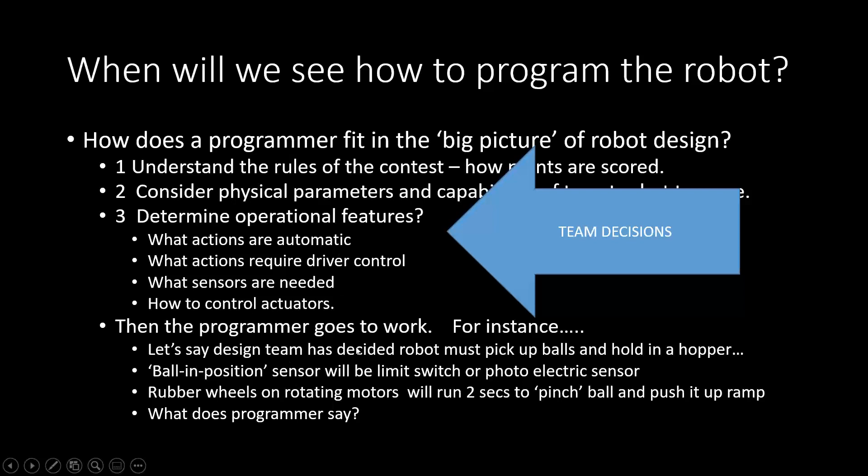Then we need the program to start the motor and push the ball up into the hopper. And again, all this stuff up here is a team decision. Down here is where the programmer really starts to earn his keep. So let's say this is kind of the mechanical design we're looking on, and the function we're talking about is this one down here where the driver guides the robot so that a ball presents itself, and there's some sort of a switch that tells us the ball is in position.

And we need to drive these motors at counterposing directions to be able to push it or kick it up the ramp. And so in the discussions that we've had, I've shown you how to drive, because these are numerical signals now, to create a numeric signal that has a positive direction and a negative direction. And that's what we need to apply to these motors.

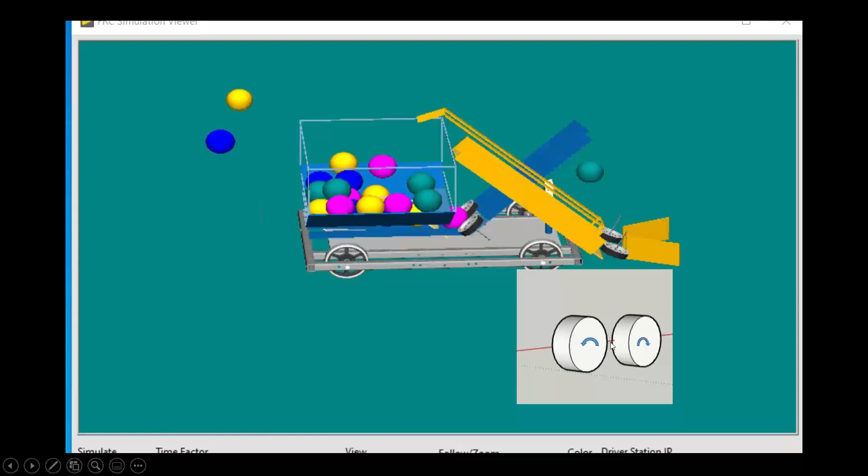So then the word problem that you as the programmer should create is this. When the ball is in position, it is true. When that signal is true, because it's a Boolean signal off of the limit switch, and the driver presses the button on the joystick, then the motors will run for 2 seconds to push the ball up the ramp. And if that's what the physical designers want to happen, then this is the word problem that you need to solve as a programmer.

Now, and we'll get into this a little bit more next class, but if you don't want to burden the driver with this function, it could be included in an automated control, in which case the word problem would be when the ball is in position and the limit switch is true, then the motors will run for 2 seconds to push the ball up the ramp and then stop and wait for the next ball in position signal. And if that's what the team wants to do, then you need to design the system that'll make that happen.

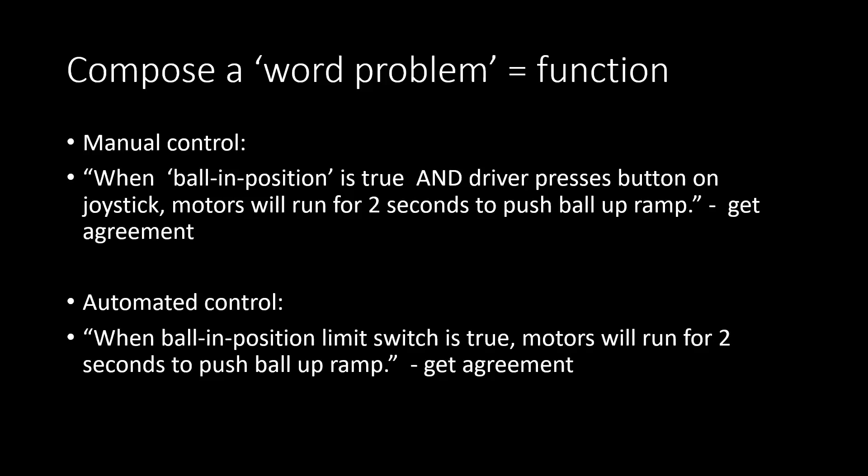Anybody got any questions on that? Does that make sense? I think it's pretty clear. It's important for newbies. It's real important that you step up and start asking these questions. Don't wait for somebody to tell you this. You need to know what it is you're trying to do. So I encourage you, and asking questions is the best way to go. So I think it's a good sign that you've got people that are willing to step up and say, hey, I don't know what you're saying. Tell me again what's going on.

Okay, so what we're doing tonight is I'm going to image the RoboRio. Before you run a program, after we've imaged it, that just means we can talk to it. The next thing we want to do is make sure that it's wired correctly. And so I sent out 2 Word documents that are what I call robot setup worksheets. And the idea is to have a list of every channel that's on the RoboRio, and then make sure that the wiring I/O, the way the robot is wired up, matches what you've agreed to.

And so that device, see if I can find it. This list, this robot setup worksheet, is like the communication vehicle between the people doing the construction of the robot and the people programming the robot.

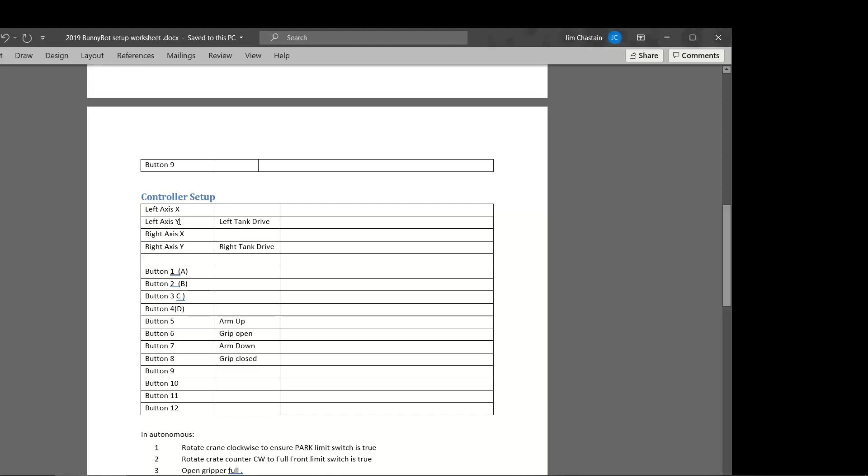And we'll get into some of this other, but this is the way that the joystick is set up. And so there's an agreement that we want to have tank drive, and so we're going to need to have the x-axis, the y-axis of two joysticks come out and be available for the drive mechanism. So this is a typical setup worksheet after the design has been done. And the idea is if you're going to change something in the physical design, the programmer needs to know what you changed, and we both agree to make a change to the setup worksheet.

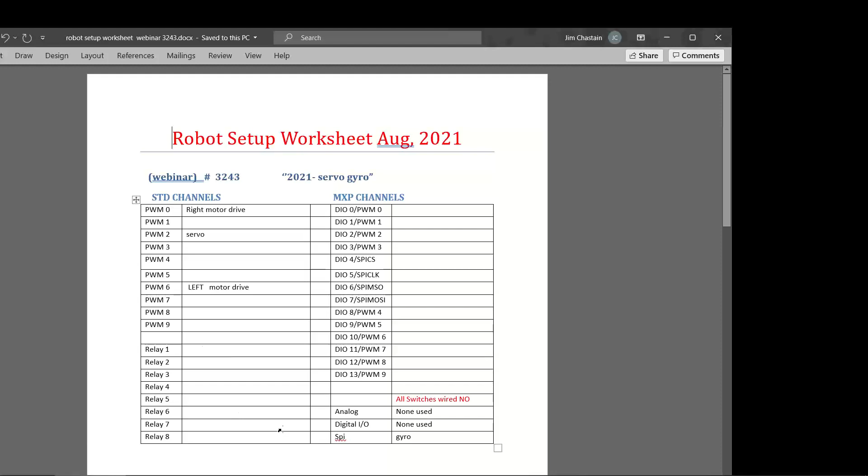Okay, now, so what I'm doing tonight is I've got a setup worksheet for this particular robot, and I want to make sure that the wiring matches. We've got PWM0 set up to drive the right motors, PWM2 for the servo, PWM6 for the left motors. We got a gyro on the SPI port, and I think that's all I've got.

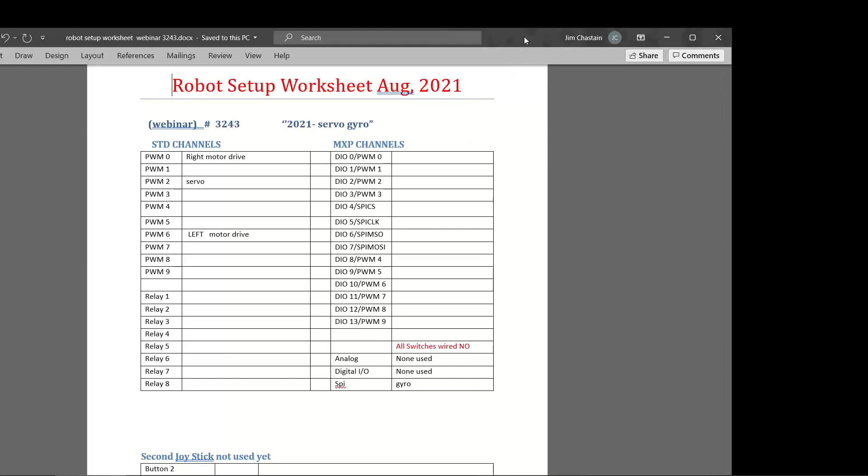Okay, so with that in mind, let's go see how our imaging tool is working out. Okay, so it's completed the image, and it says it was successful. The IP address is 172.22. The host name is my team number, and it says you must deploy code to use the robot. It's like, okay, fair enough. And when I click OK, what it's telling me is it's programmed the image in the RoboRio that allows me to communicate with the RoboRio from the driver station.

So now that I've recognized that 3243 is the team number that's been programmed into it, and we're with our latest version of the field image or the game image, I'm going to close this. I'm going to go out and open my driver station. Now, if you recall, the thing that we haven't done in all of the classes we've done so far is build the code. We played with it in the simulator, but we haven't really built it. So now I've got a dashboard and a driver station.

Now, the fact that I have this set up for this team number allows me to see that there's communications with the RoboRio. If I have a different team number in here, it's not going to like it because the communication system is not set up to recognize this other number. And so this is what keeps us different from anybody else on the field, and it's important to stay on track. Now you'll notice it gives us the status of the battery. The battery is a 12-volt battery, and you don't want it to drop much below 11.5 as you're running, so you want to keep charged up batteries available.

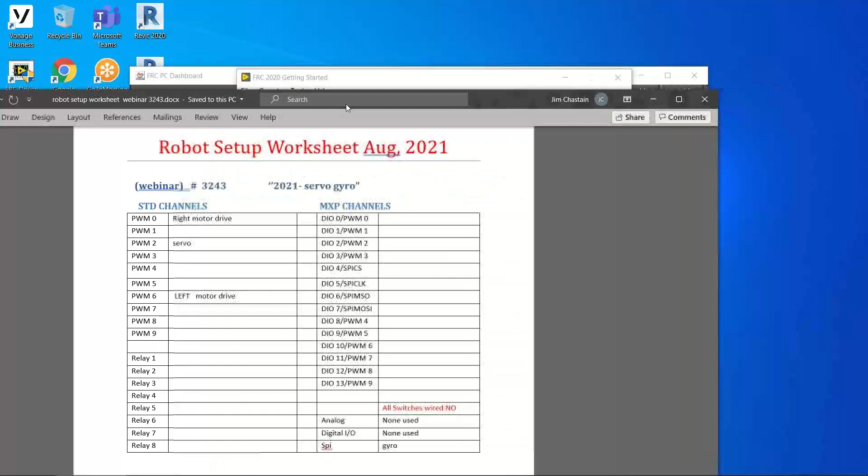Okay, so when I say we're gonna set up, check the wiring, I'm gonna use the motor control example and verify that the right motor is connected to PWM0. So the way you do that is come down here to Support, click on Installed FRC Examples, and it brings up this little display here. And what we're looking at first of all is robot and motor examples, and I want to go with the plain motor control.

Now, with my teams, every time we've turned the robot off for more than 2 hours, let's say, like overnight, or we've transported it, I insist that when they first turn it on, they go through every channel and make sure nothing has changed since we last turned it on, because we don't want to run a program where the wiring is different than what we expected.

So if I double click on this motor control example, it opens up an example for me that looks surprisingly like a robot project that we've been using, except there's not the FRC framework. There's just a VI, and again, they're showing us an example of how to hook up the motor. So this is what the RoboRio looks like.

And all the channels along the right-hand side, if we're facing it, are labeled PWM or pulse width modulated. All the channels on the left side are digital I/O or DIO. There's 4 relay channels down here at the bottom, and there's 4 analog channels. Now, this is a motor controller, and they show us the colored wires on a PWM cable and how the orientation should be. So right now I'm going to test PWM 0.

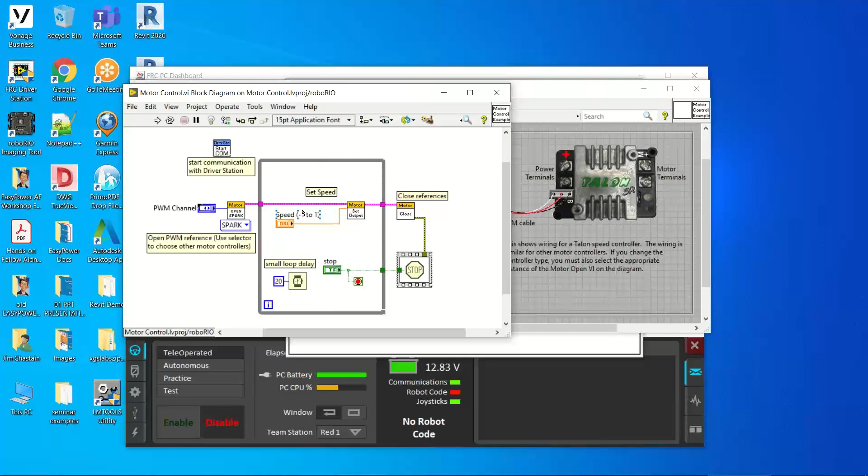Before I do that, I'm going to show you what the block diagram looks like. The reason we want to see the block diagram, this is how we would hook it up to run it. This is how the program is running right now, but this is what we need to reproduce when we get into our own program. So I'm going to run this with the arrow. It's going to show me that it's deploying it. It has to check for the conflicts in the communication link, and then it dumps the code.

Now, right now, it's running the code as it loads this code into DRAM in the RoboRio. And so we're running it both in my laptop and in the RoboRio, and that's why we can use probes when we want to look at the block diagram. Okay, so it's loaded it in. Now we're registering that we have robot code. And you notice we need to have the driver station running and teleop enabled.

All right, so again, this is a dangerous machine, and especially when it's hooked up to my laptop with a USB cable, I don't want it to get out of control. So before I turn anything on, before I enable anything, I want eyes on the robot, and I want to make sure there's nothing touching the wheels or any wires or anything that's going to be moving. So right now things look pretty clean.

Now, another thing to remember is emergency stop is the space bar on your computer. So the first time I turn on a robot or have any of my students turn on a robot, I have one sitting with their finger over the space bar, and if anything goes wrong, shut it down. Okay, so with that said, let's go ahead and enable it. We have a zero signal. Now I want to increase this just a small amount. So 0.1, nothing is happening.

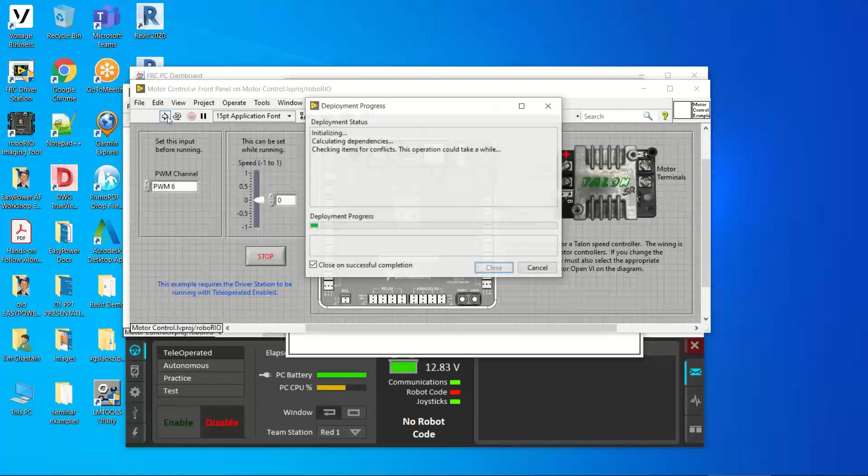All right, so now that I've changed the channel on my example, I can run it. We've got good code. I'm going to enable it. Again, I'm checking to make sure there's no wires or nothing touching the motors or the belt drive over here on the right side. And I want to start very slow.

Okay, with a positive signal, the motors are driving such that they would push the robot forward. So that's the opposite signal that I would get from my joystick. So this tells me that my channel PWM6 in my program needs to make sure it's inverted.

And if I go negative, motor goes backwards. I don't know if you can see that, but you can also see there's red flashing lights from my motor control. So at this point, I'm happy. I can probably make a lot of noise.

Okay, so I'm happy with my motor connections. Now I need to make sure that I'm making a note, again, for my program to make sure that it is inverted for PWM6.

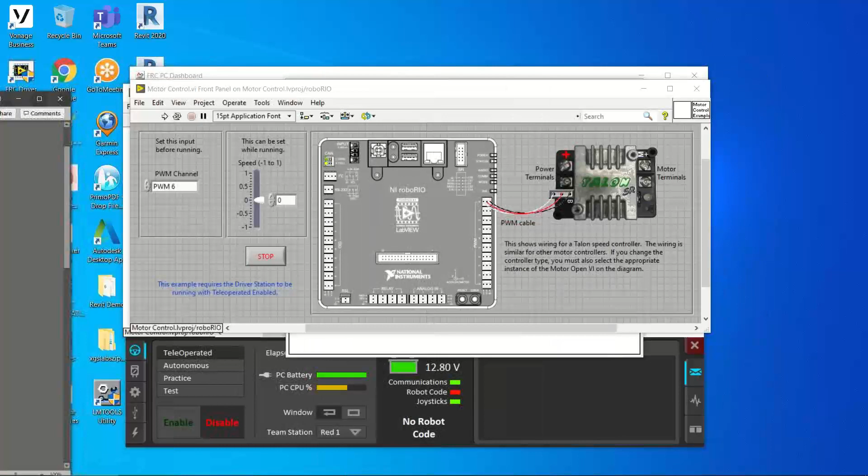Okay, I've also got a servo on PWM2, so let's go find the servo example. I'm going to close this out, go back. My example is this little magnifying glass down here in the taskbar. I'm going to look for the servo example. And it's exactly the same type.

It shows me how to hook up a servo to my PWM channels. It shows the white wire to the inside. So my PWM channel is this little puppy right here. I just have it sitting up on the edge of the robot, and it's on channel 2. So it's 0, 1, 2 as far as the PWM channels. And my white wire indeed goes to the inside of the RoboRio.

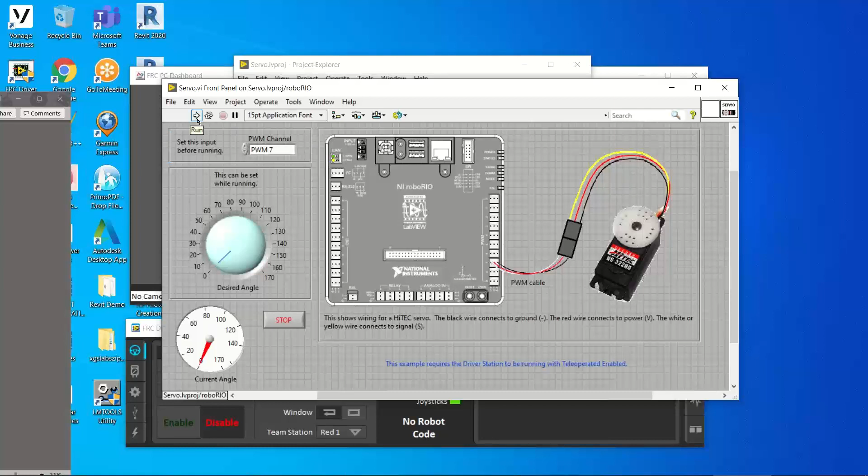Now, if you recall, the servo - well, let's just see how it runs. Part of this is understanding how the device works, and it follows the angle that I give it. I want to make sure I put a little sticky note on the wheel so we can see if it's turning.

Okay, now again, we need to activate it... so I'm not seeing anything change. Ah, I got a PWM7. Nice going, Jim. So let's stop. We want PWM6. No, 2. Sorry about that.

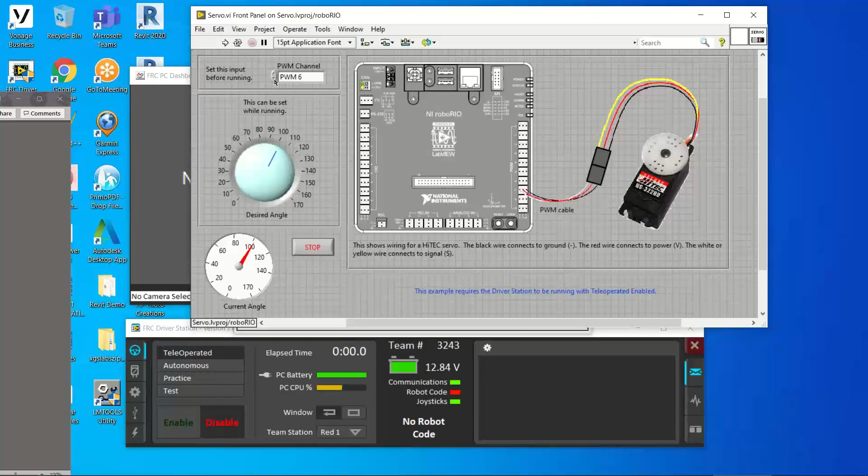Here I was saying bad things about my wiring team, and it was me. PWM2. And again, I verified that there's something on PWM2. Looks like it's a servo.

All right, so we got the code running. Let's enable it. You guys see the little sticky note changing directions? Now this is what's used in a remote control airplane system for the ailerons. So it's got some fairly decent torque on it.

Can you see it change? Oh, it's over here on the bottom right. Okay, so I haven't verified the angle. I'm not too worried about that, but it does follow the commands to increase and change the angle.

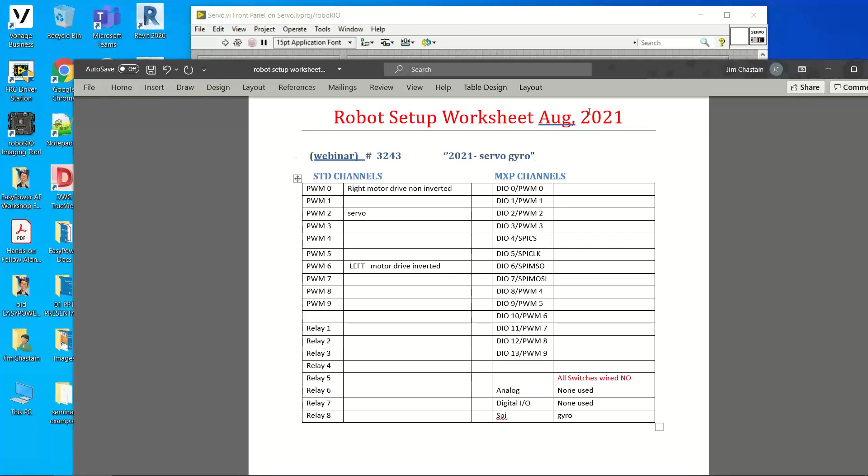Okay, so the only thing left in my setup worksheet - I'd make myself a note that the servo seems to work okay. The only thing left is my gyro, which is plugged into the RoboRio itself. So I'm going to call up the gyro angle, the gyro example.

Now, again, I strongly advise testing all your I/O channels before you run the code, for a number of reasons. One, it's good practice, and two, there will be a time when things fall apart, stop working, and you're going to be in the middle of a contest, with all kinds of noises going on, and people looking at you to make sure you're going to get it to work, and you need to have something to keep your head together.

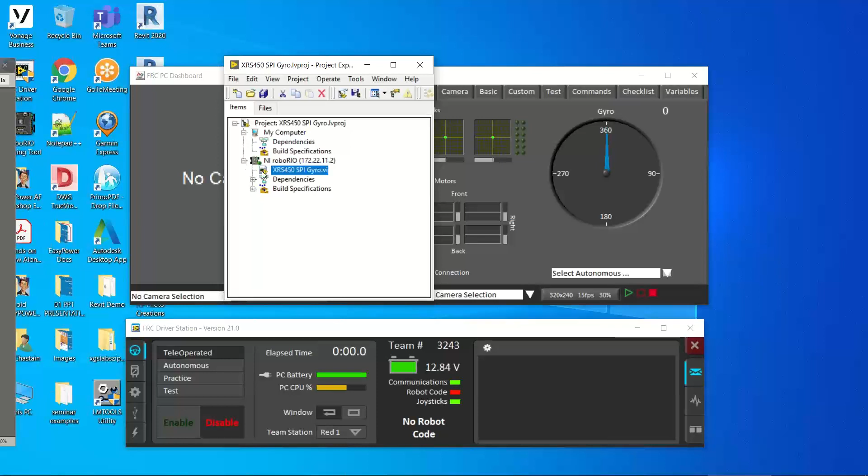And being able to run these examples and know them like the back of your hand will be extremely useful in troubleshooting what's going on in the robot. So don't be afraid to practice these channel checks every chance you get.

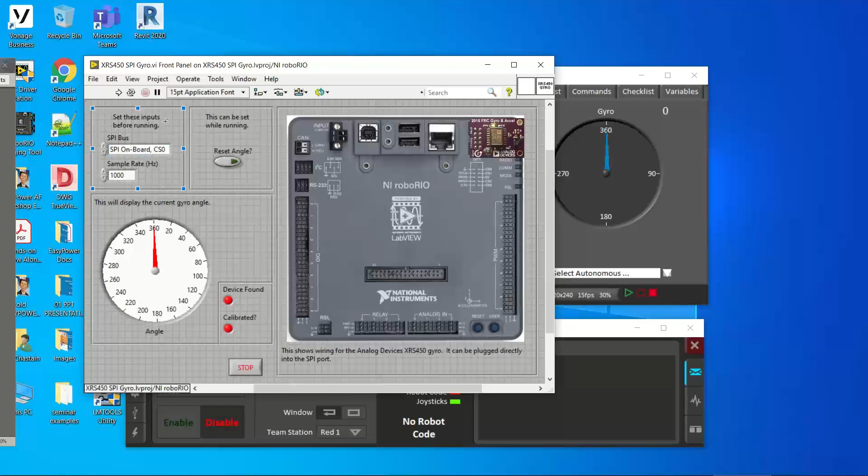Okay, so again, this is a gyro example. It's actually plugged into the RoboRio itself, and this location is known as the SPI, or serial peripheral interface. So it's the onboard CS0. We're going to run it. Now it's set up for a sample rate of 100 hertz or 1000 hertz. So I'm going to, by default, just take their word for it.

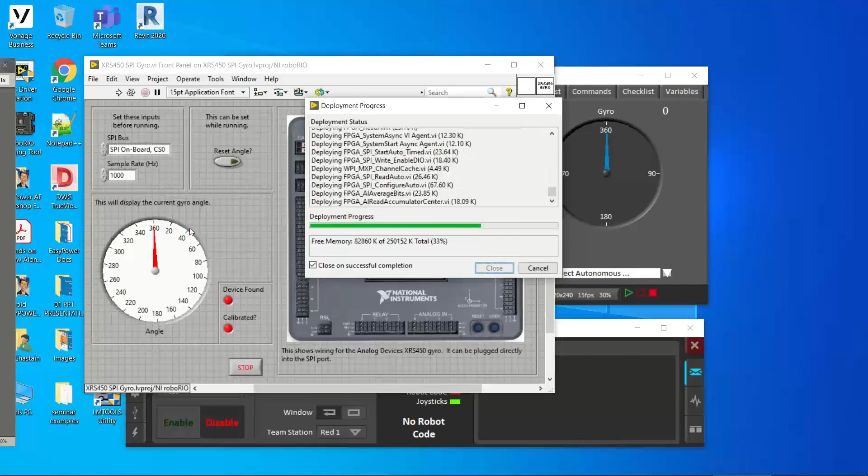Seems like it's running pretty good. Now, if I had a different type of gyro that had a cable on it, I could pick the gyro up and move it independently of my cable, so I can see that my device has been recognized. If I go to the block diagram, it's showing me, okay, on one of the outputs from the get angle - oh, it's actually from the pipe coming from the gyro - is the recognition that it's been found, and so it's showing me a positive signal.

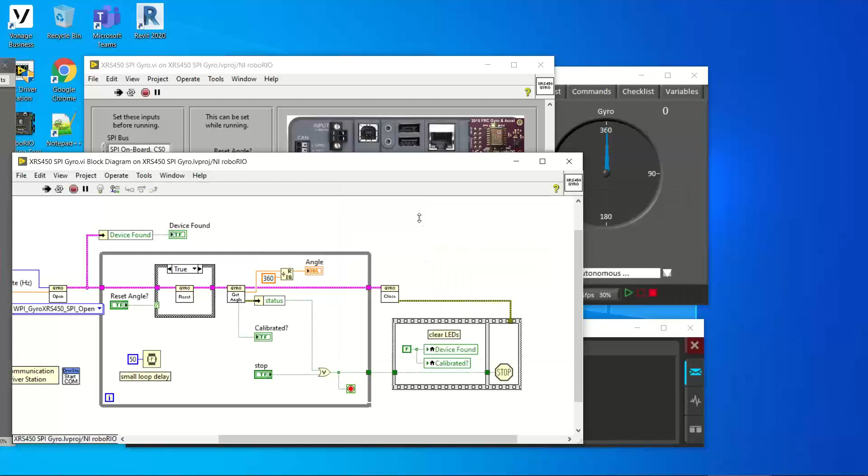It found it when it booted up, but it's not finding it now because it's not executing—we're inside this loop. So what I was trying to say is, to see if the gyro works, I have to move the whole robot. Fortunately, I have it on a box that I can kind of scoot around.

So my gyro works. Does my reset work? It works. Anybody impressed yet?

I'm impressed. Good. And I strongly suggest that students go through this every time you turn the robot on, for the day, for the night, for whatever your meeting session. Okay, so now we verified that our wiring team did a good job.

Now I'm ready to load the code and try to run my code. So let's go back—I wrote this down somewhere. There's a couple things I want to do. First of all, I want to open up the dashboard. I actually wrote these down.

So 2021 3243 dash—we're going to build and store a dashboard that reads the servo right here. Okay, do you remember when we were playing with the dashboard in the simulator?

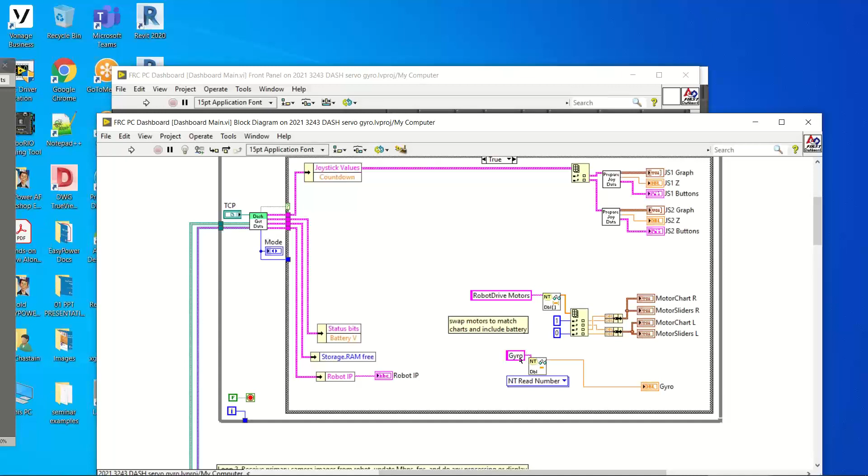If we go to the block diagram, I've read—I will, when we get to the program, write the value of the gyro into the network table, and in the dashboard, I want to read that value, and connect it to the display. I need the spelling and case for this channel name to match what I use in the program itself.

Now, we don't have a camera, so we're not going to worry about the image right now. So now I'm going to save this and build it.

And to do that, I need to look at my project. So I'm going to build—just right click and build. Takes it a couple minutes.

Now, with that in mind, I'm going to close this one. This is the one it loaded originally. And we're going to have to check to see if it comes back. So I'm going to keep this handy.

Next thing I want to do is open up a program that I've already written in the robot project. So let's go to my getting started page.

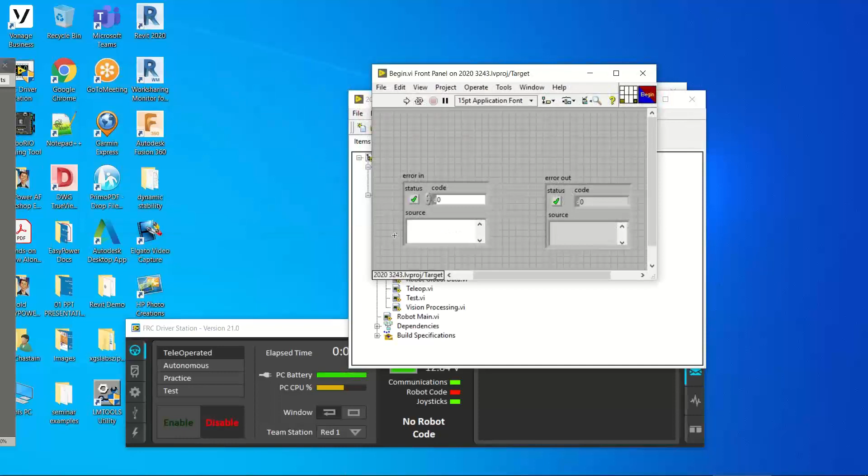Okay, again, I need to have my motors lined up with the channels that we're using in the setup worksheet.

So here, this is not the one I already did. Let's give me a chance here. Talk among yourselves, I'll be right back.

Any questions about the setup worksheet? Everybody understand what we were doing?

Yep. I'm okay with you there. Okay.

So let me catch up here. I've actually already got one set up, with the gyro being the main thing I'm keying on.

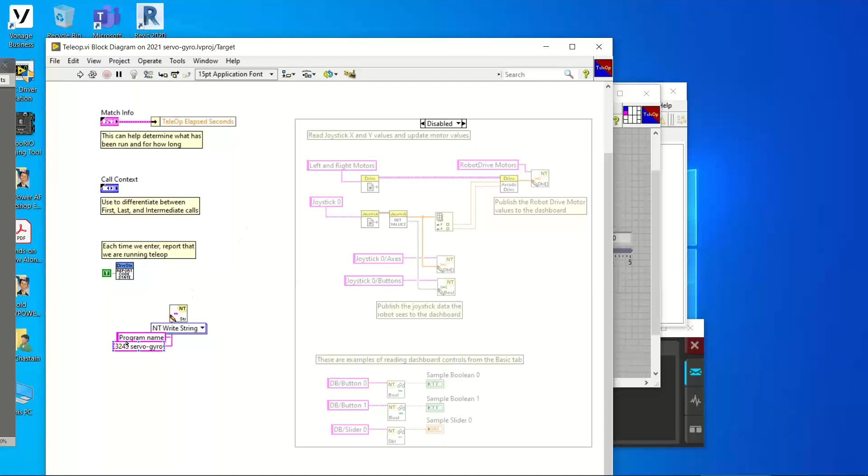Now here we go with TeleOp. If you guys recall last week, what I do is disable everything that's TeleOp with the exception—I disable all the code that exists, except I write the program name to the dashboard. So one, it tells me that we did get into TeleOp, and two, it tells me the name of my program that I've loaded into the RoboRio. And then finally, I put everything in the periodic task.

What that means is in the top loop, I call it loop A, sensors and joystick. Here I've unbundled the joystick from the pipe because I know joystick 0 has been put into the pipe, and I use the get value icon.

I take the array for the joysticks and I use joystick x-axis and joystick y-axis, and I save it, or load it, into robot global data. Then I also write the joystick axis to the dashboard with this label, which was used in TeleOp.

Likewise for buttons, we index it. I'm going to use button A to... I think, reset the gyro. Excuse me, button B is going to be used to reset the gyro. And then button A is going to be...

It's going to control the servo. So when button A is false, the servo is going to indicate 25 degrees. When button A is true, it's going to move to 120 degrees. I've saved the angle for the servo to robot global data.

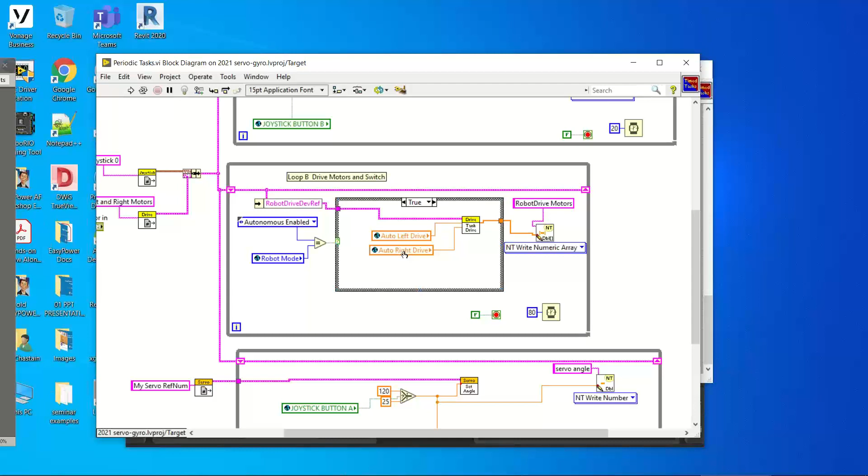In robot global data, I've got my joysticks, x-axis and y-axis, buttons A and button B. I've got the raw gyro data and the gyro display coming from my gyro output. You'll notice it's on a 360 range for the display, and when it's raw, it's going to be something different. We'll look at that when we run it.

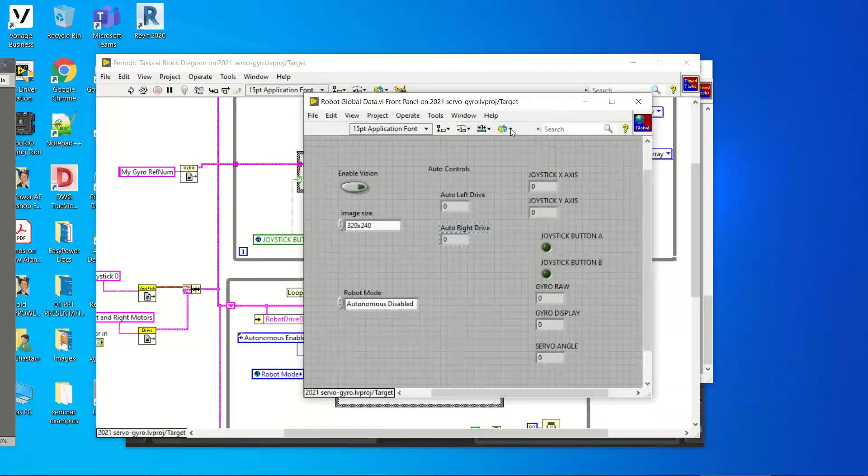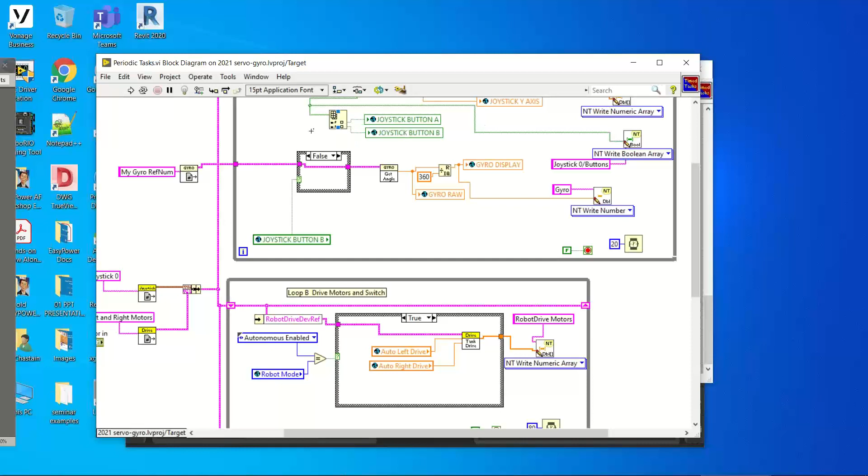Even though under my auto controls I have auto left and auto right drive at 0, I want to make sure I don't accidentally have any values set for that. So back in begin, I set up and set those values to 0 right here. Likewise, they always set up autonomous disabled for robot mode, so nothing can move when you first enable the robot.

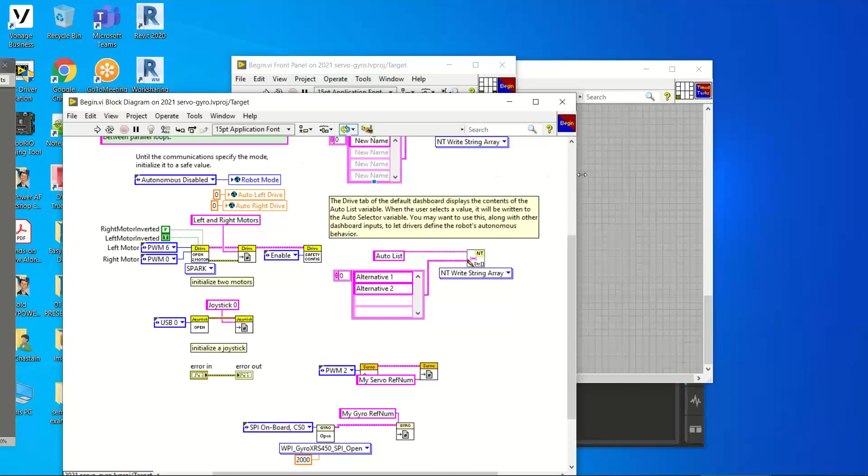Any questions about any of that? Okay, so we're going to run the program for the first time and see if it's running. Let's open up robot main.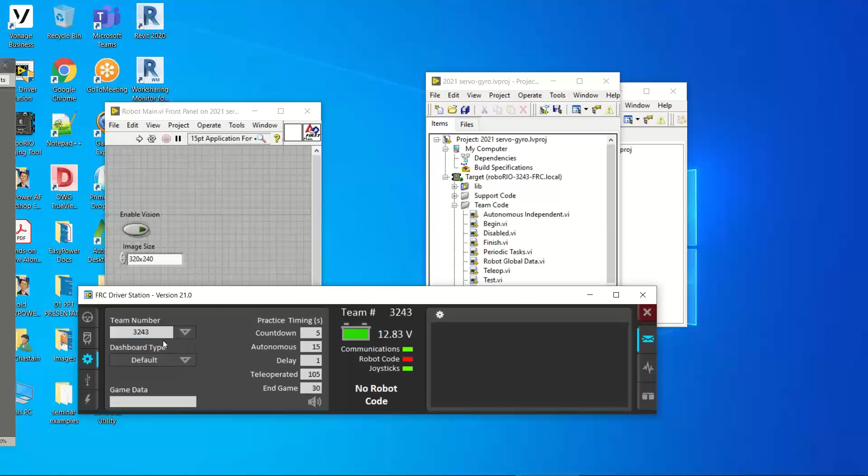I'm going to go back and see if I can tell if my... go back to default, and then see if my LabVIEW dashboard version is going to come up for me.

Okay, I'm going to run the code on the robot. We have communications, we have good voltage, and it's doing its thing.

Anybody have questions? Do you have to redeploy that code every time? Well, I do until I flash it. I mean, I haven't even debugged it.

So first I'm going to debug it, and then once I'm happy with it, I'll load it into the flash. And then the answer is no, I don't have to. When it boots up, it'll have this code in it. That's the last step. That's what we're doing, and that's the step we haven't covered before.

So right now I'm just running it similar to the way we were running the simulator. I want to make sure that my controls work, and if I've got the right dashboard, my gyro indicates.

Now, this came up with an error that says the gyro is having an issue because we're overwriting the depth of the FIFO. So I'm going to go back and talk about this for a second. I'm going to stop it with finish.

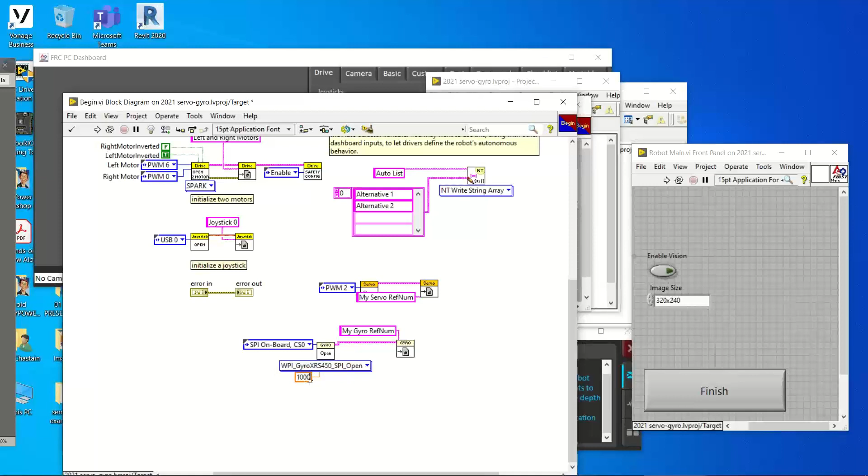When I set up the gyro, I used a default value of 2000, and what that error message was saying is that the RAM, or the FIFO, first in first out memory that's allocated to the gyro function isn't that large. So we're going to go back to 1000, because that's what they used in the example, and see if we can run that without getting that error.

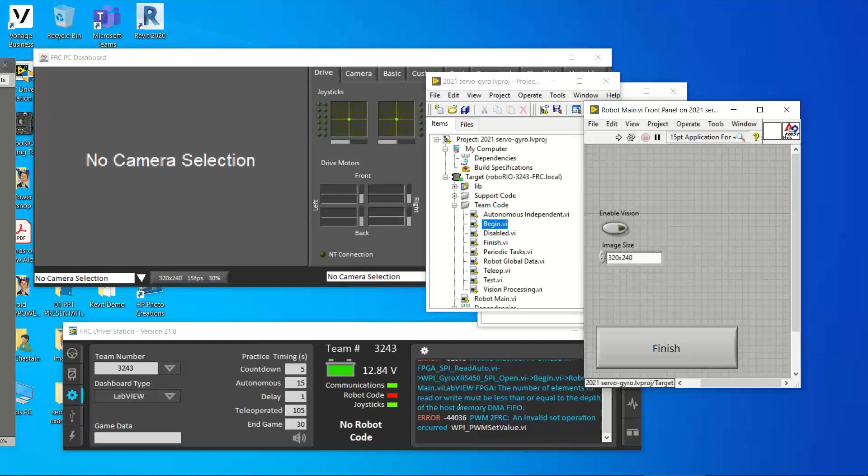The little technology details, like that's what scares me. Well, we'll run into things. But see, that's what's going on here, is that it gives you clues, and you just have to do a little bit of research. And you know, I should have stayed with what was in the example. I didn't. I took the default, and I made a mistake. But the reason for the details is there's some pretty cool technology that most of the public isn't aware of.

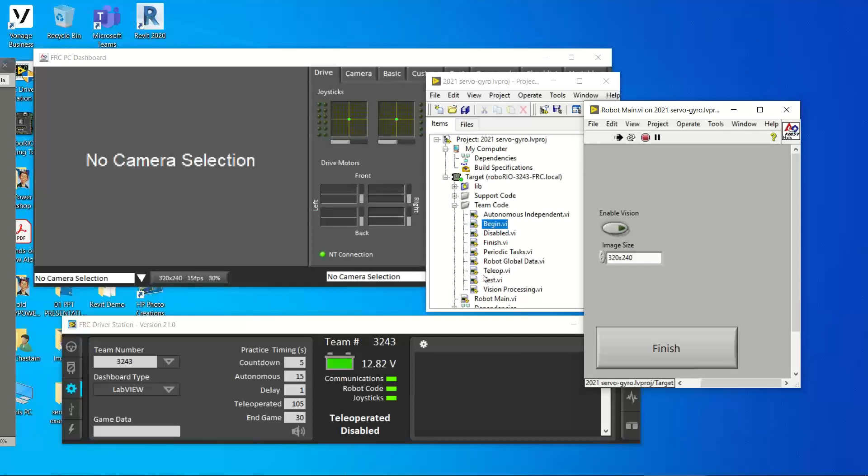Okay, so let me see if it existed here. WPI PWM set value. Okay, that one I'm not familiar with, so I'm not going to think anything's wrong yet. Okay, now here's another thing. Before I run the code, I want to verify all my controls work. So until I've enabled it, nothing's going to drive, but my robot global data is indicating all my signals.

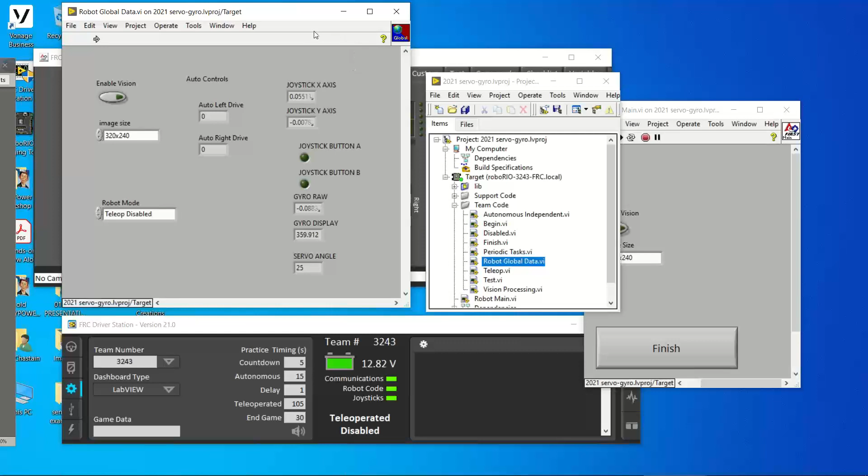So the joysticks work, the gyro is drifting, which isn't hurting my feelings too much. The buttons work, and I've got 0 for auto drive. So all of my controls are working as far as the program is concerned. So now I'm ready to go to teleop, enable.

Now, the other thing that you'll notice, even before I go to enable, you notice right here on the dashboard, I've got my joystick indicating, and these are the motor control signals. So if I go forward, I've got the left and right, one going a different direction or a different signal than the other. And it looks correct, because the right side is negative, which would make it go forward, and the left side is inverted. So again, it looks like things are in good shape.

So I'm going to enable it. We got my network connection. I'm going to go forward a little bit on the arcade drive. So pushing the joystick forward, I get both sides going forward. Pulling it backwards, it goes backwards. If I go at an angle, one side goes forward and the other side goes backward. See what I'm talking about, Leo, as far as the signals from the joystick driving each side. So this is arcade drive. So it computes based upon what the joystick is doing, what signal it needs to send to the left and right side.

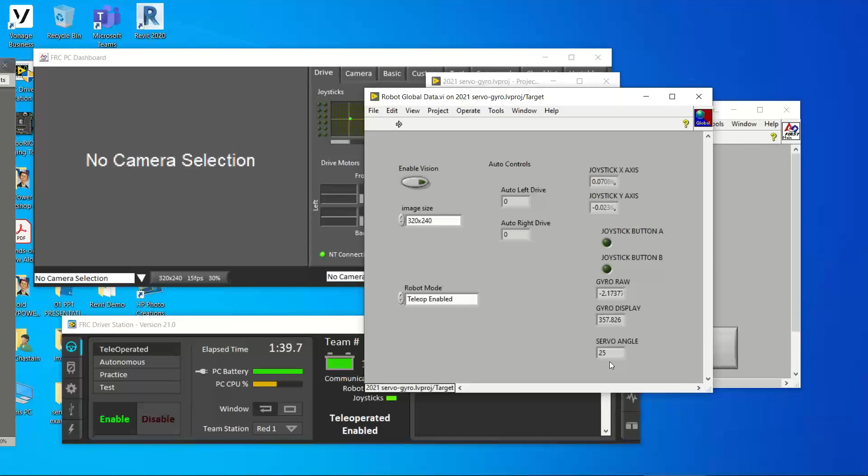Okay, now, because what we're going to do is deploy this into the flash, we won't be able to use probes. Right now we can use probes because we're still running the code in the laptop. When we deploy it into the RoboRio, we won't be able to see it, but because we're writing the variables on the robot global data into the dashboard, we can see them change here. And this is what we would use to debug it or verify what's going wrong.

When you talk about probes, you mean looking on the main global, the robot global data? Those are the probes you're talking about? No, I'm talking about the ones that we put in. If we go to the block diagram, we can look at the probe right here. And so this tells me all the buttons that are coming off of that joystick. And if I push a button, it tells me what's happened real time. And I can probe any signal line in the system. So let's say I want to look at my angle.

Yeah, I don't remember us talking about that before. So what are you doing to get the probe? Are you holding down a special key? Nope, you just left click. Or you just hovering over it? See, it has a little P on it whenever I... So let's look at this. Right now, I'm using the joystick to drive the motors, so I can put a probe there. Now see, here's your dead zone. See, based upon friction and inertia, there's a built-in dead zone in the motor controls, right?

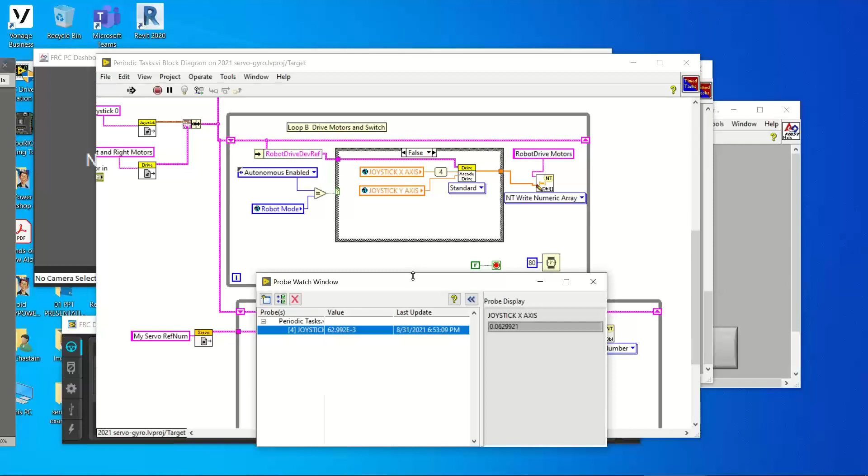Okay. Right. So we saw it in the simulator. It's not necessary to do it in the robot itself. But yeah, we've talked about these probes. You might want to go back and see the first or second lesson. But okay, so again, the purpose of it is to allow me to debug. If things weren't going right, I could literally track my signal through a logic chain and figure out where it was going wrong.

Fair enough? So once you flash the code, you won't be able to do that anymore with the probe, right. And so that's why we write it to the variable list, and we can see the same thing. We can have what are effectively probes where we've written out that value to this list of variables.

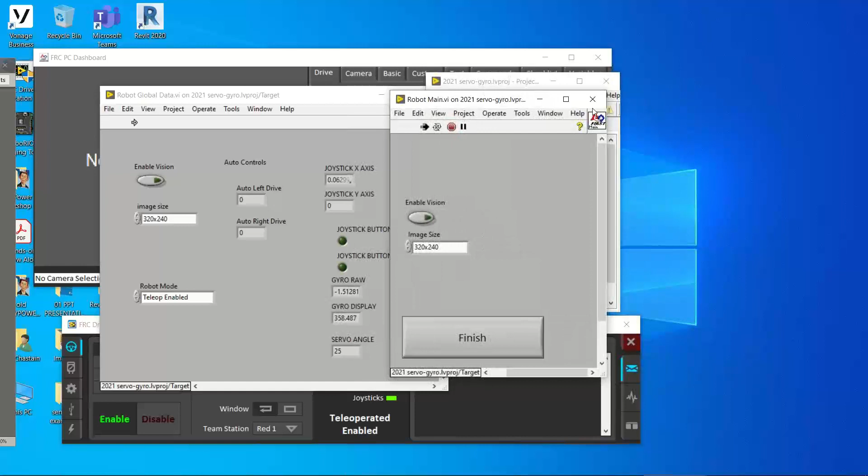Now, I want to see if I'm indicating. I'm going to twist this around and see if my gyro's hooked up. Nope, we didn't get the gyro. Okay, we'll fix that in a minute. All right, so right now I'm happy with the robot code. Everybody agree with me that we're solving our problems? I'm going to finish it, finish robot main, save the program. The little asterisk means it hasn't been saved. So we're going to save all.

Now I'm going to go back to the build specifications, and I'm going to right click and save it as a file that can be loaded into RoboRio. So I'm going to start a new one. I can build any number of different real-time applications, and that's what's called Flash when I load it into the RoboRio. So let's say a new one. Let's call it Jim's First.

And I might have 2 or 3 that I want to try and compare or whatever. And then I go to Source, and I want to include my robot main as my startup VI. And then I build this project. Now again, that's why I write the program name into my variable list, because once I put this in Flash, I may forget where I got it, or even what I named it. There's reasons you need to keep track of what worked and what didn't work as you're trying different things.

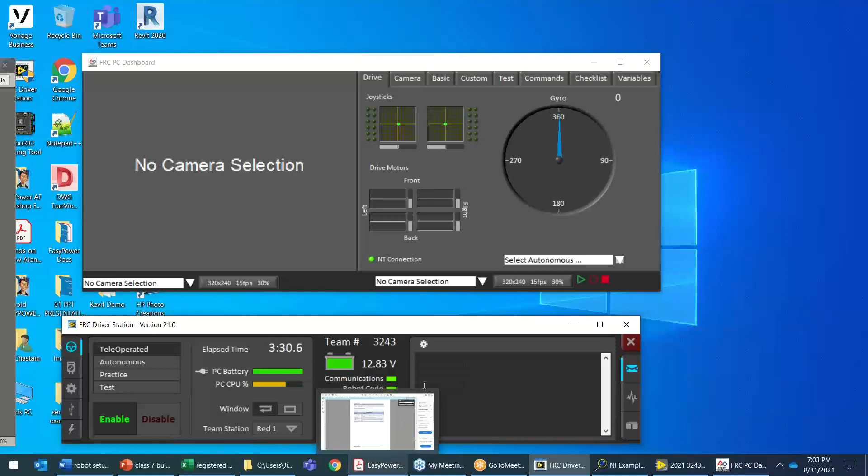Jim, you talked about gyro raw, the raw gyro as opposed to the other gyro. What's the difference? Oh, if you look at the signal, let's do that. Now, another question you asked was if you run another program. So even though I've closed it out, let me see. I put it in my code, but not into the variable list. The difference is the display.

If we look at the signal coming straight out of the gyro, it goes from minus 180 to plus 180. As far as I'm concerned, that's easier to use in autonomous. But when I want to display it on the dashboard, the display goes from 0 to 360. So there's conversion involved. Oh, okay, that's all. You just converted it into more user-friendly numbers. Yeah.

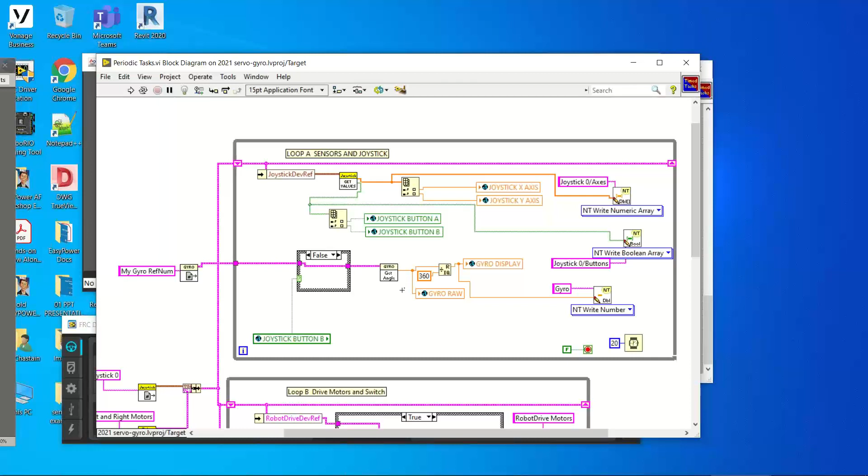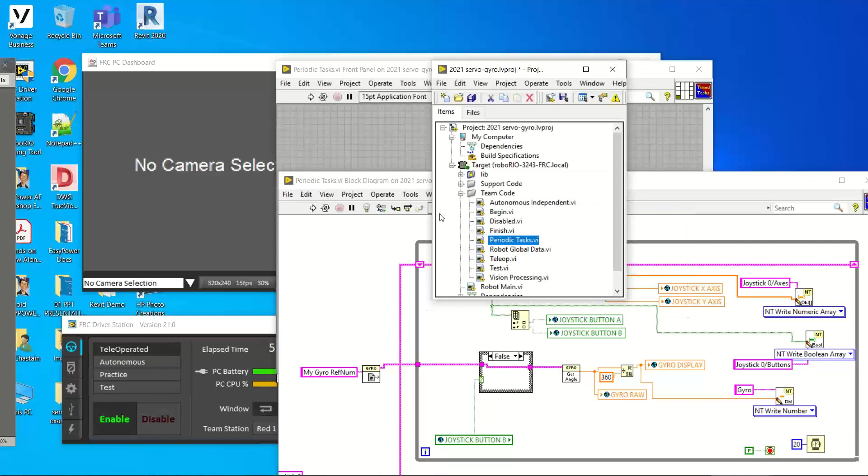I like using the raw data for autonomous because I don't have to worry about things being greater than 360 or greater than 180. It's always going to be less than 180. I just take the absolute value and I know if I'm turning right or left with the motor control. So let me just run this and show you. Now that we've got this open, even though the same program is what's booted up, I can rerun this program and place my probes and look at it accordingly. So watch this.

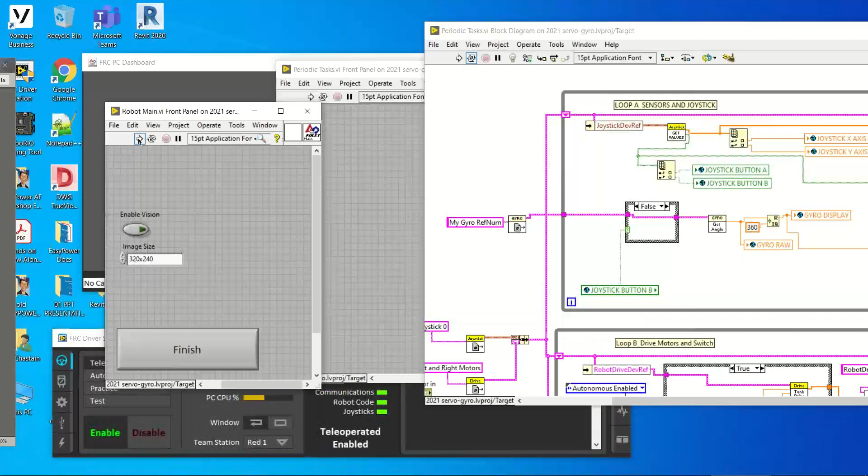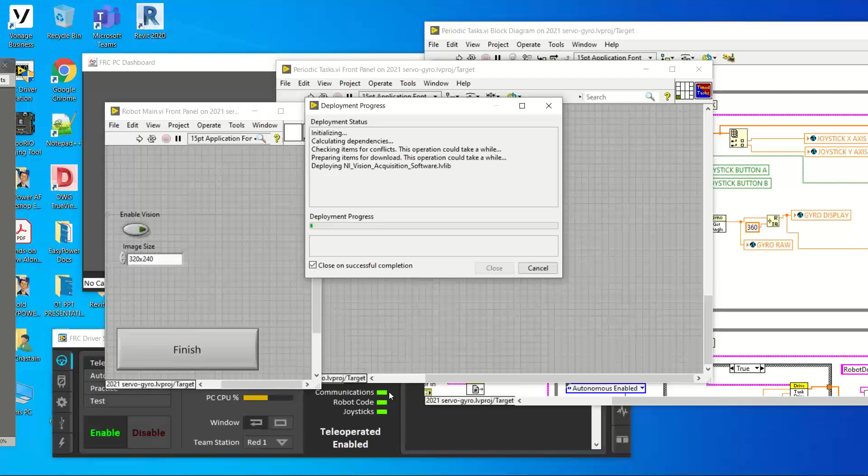So we already have a real-time image running, and I'm going to say, okay, run this one. And it'll say, are you sure you know what you're doing? Because we already got something going. See, it says it's already running in real time. Are you sure you want to do it? So I say, okay. Now again, this doesn't get rid of it. This just runs it into RAM. That's why I might want to run something with different servo settings and see how it reacts. Does that make sense?

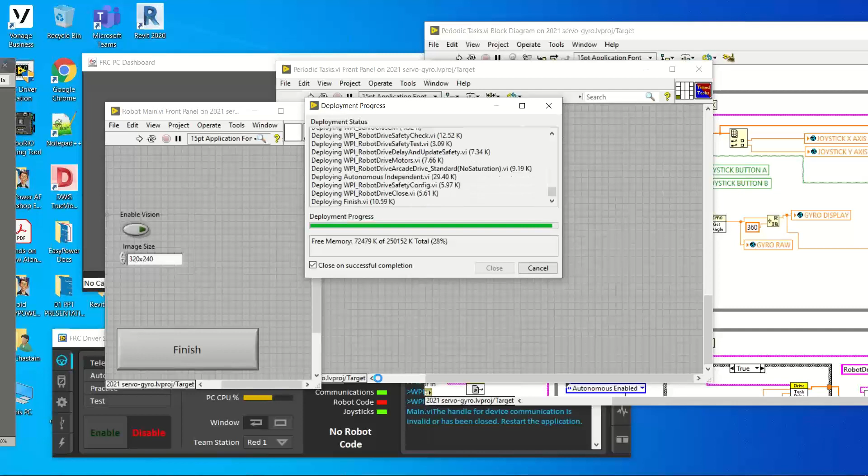Yeah. It's good to have some basic code in there so that you can verify your program's running or working. But I'd strongly recommend going through the robot setup worksheet using the examples and getting good at it so that you won't be rattled when something stops working in the middle of a contest.

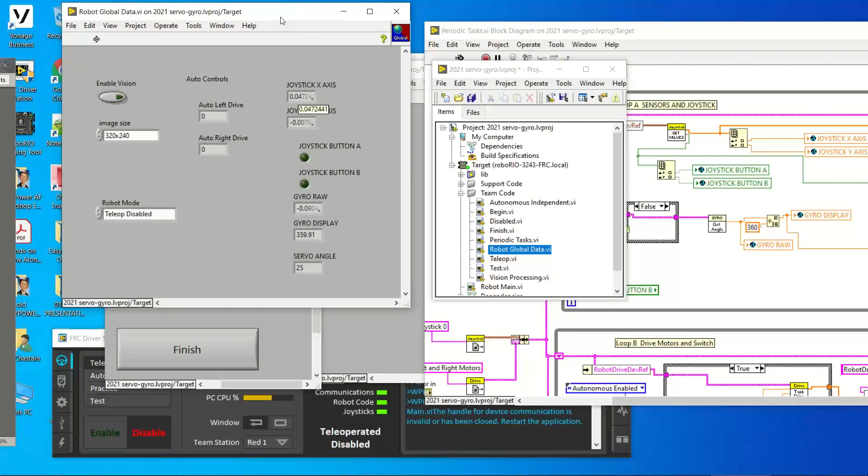So now I can look at my robot global data. I think I have gyro and raw gyro. Right now, if it's near zero, it's zero, but near zero here, it can be a very large number, right? And as it turns, if I go right, it'll be the correct number. If I go left, it'll be a negative number, but it gets converted by this little setup right here. Okay, that makes sense. Yeah. It's surprising how easy it is to deal with that and still have a neat display on the driver's station. Was there another question?

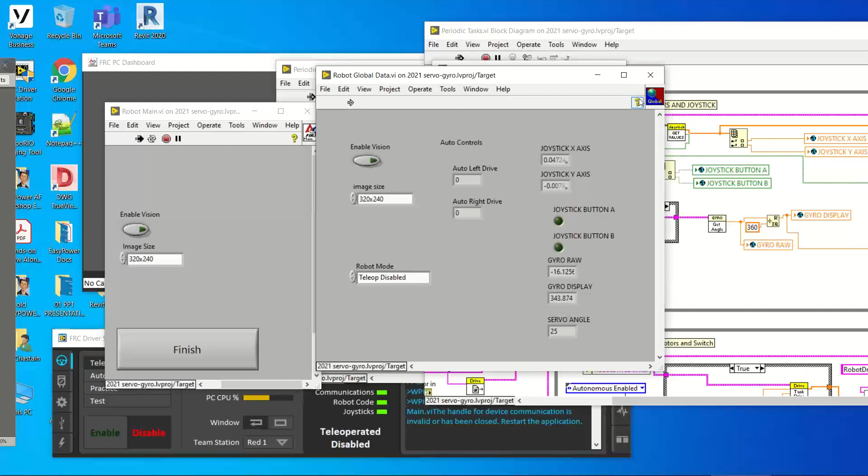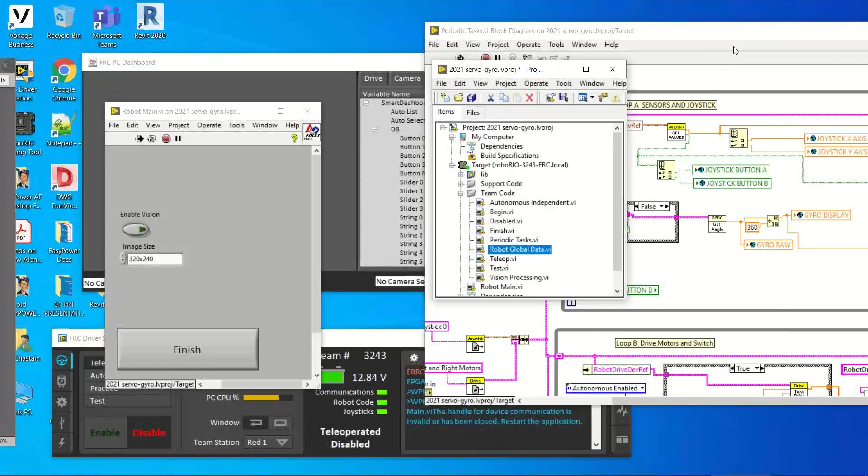Yeah, Jim, this is Steve. Hi, I have a question. So this network table is what shares data between your program and the dashboard, is that right? Correct. And did we ever talk about how that gets set up and how we know what's in there and what's not?

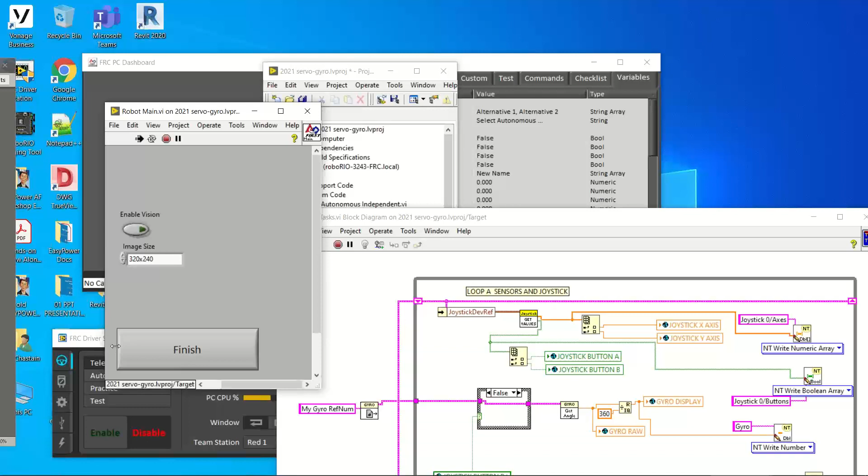Well, it's already there. It exists. It's part of the framework. And so when you use the read and write icons from the dashboard, let me stop this program. Here's another point. If I stop this, I don't have code in my RoboRIO right now. If I restart the code, then it'll start the code from Flash, which is what we had loaded.

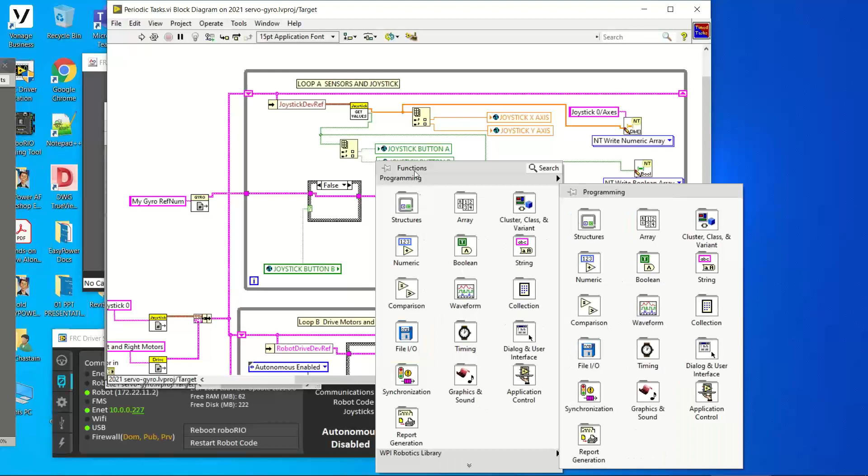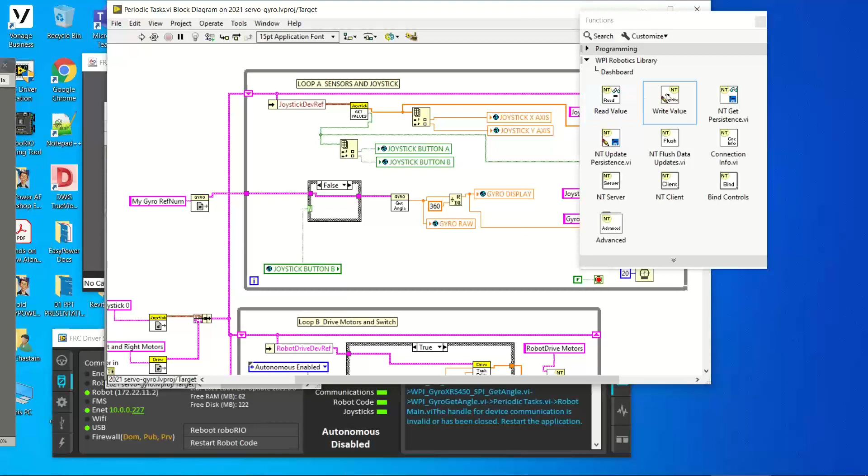Okay, so Steve, back to your question. If I come in here and right click and go to my WPI Robotics library, there's the NT dashboard, network tables dashboard. These are the two primary ones that I use. So read pulls the information down from the table and write puts it into the table. So if I want to store anything, I can store a Boolean, a numeric, a string, or arrays based upon what's coming out of here, where it's being delivered.

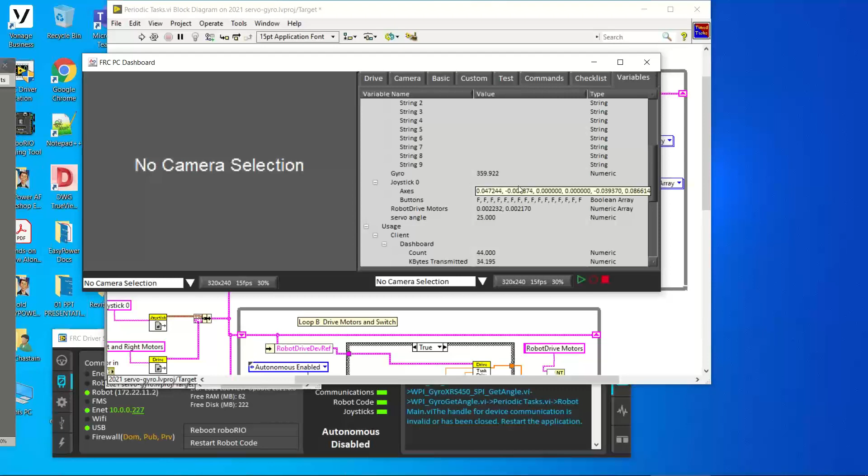So coming out of the joystick, it has an array of numeric values. Coming out of the buttons pipe, there's an array of Boolean values. That's what displays in the variables list as we run a program. So here's all my axis values. Here's all my button values, and you'll see them change as I change the button. That answer your question? That's all right. That answers your question.

Yeah. If you were to start a new program from scratch, would there already be stuff in this network table, or it's just blank and it's whatever you write into it? Yeah, it gets reset when we stop the program. Not the values, I should say that. The variables. No, if a program's not running, this channel doesn't exist. Let's kind of prove that to ourselves.

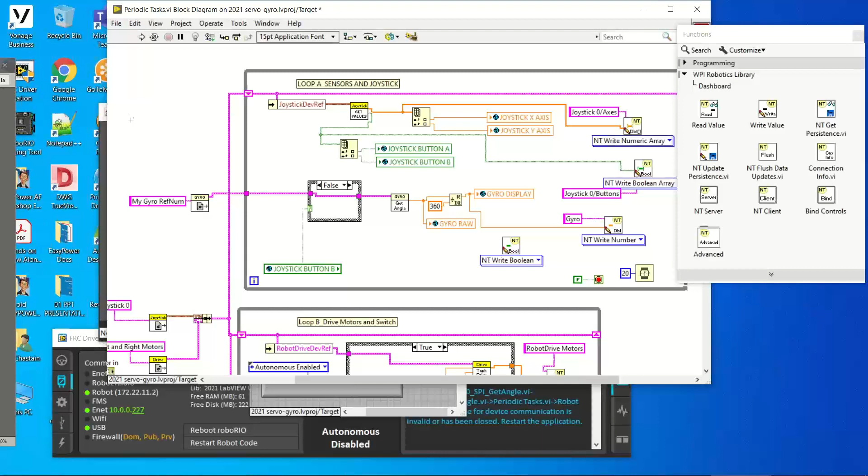If I come back here and look at my dashboard, here's my variables. If I stop this code, well, so this is booted up there. So you see it go away. The channel still exists. But I think it's because it was set up. This will change when I enable. No, I don't know when this gets erased.

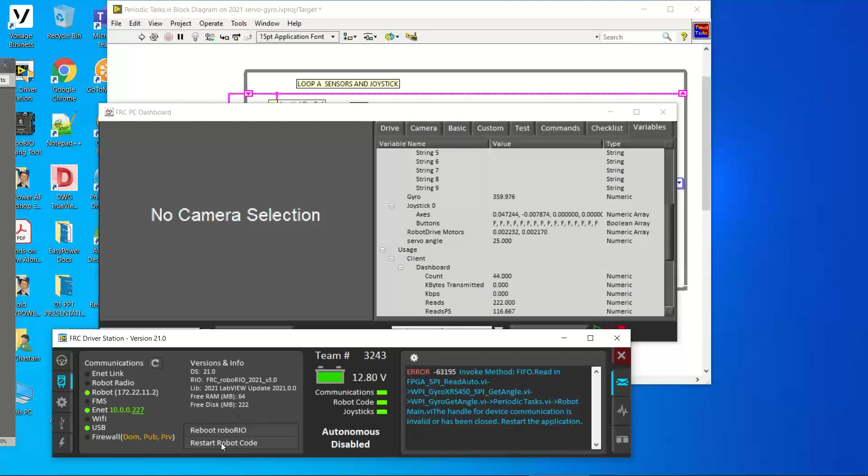It's not active now, but it was stored there and we didn't erase it when we turned the code off. So apparently this is in non-volatile memory. Let's try that. Yeah, we rebooted the RoboRIO and we still had these values displayed. So as a network table, which apparently is maintained by the dashboard, that makes more sense, right? Mm-hmm. I'm not sure what difference that makes.

All those variable names that are in there, is that something that you chose? You all had to choose all those variable names? Yeah, all this stuff up here are default values from the dashboard itself. So if you remember, we talked about these and these. So they're built part of the dashboard. And so if we come back here and look, here's our two buttons that I pressed, and here's the two sliders, so they're part of the dashboard. So that kind of tells you where that array is maintained, those names are maintained. Any other questions?

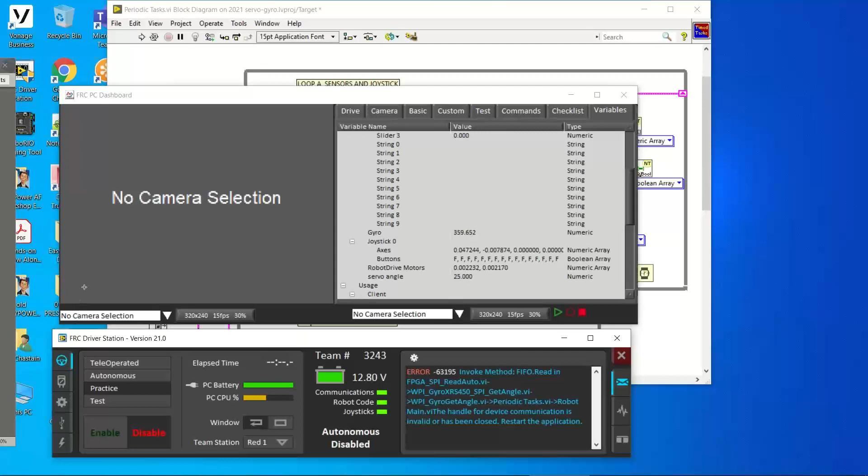Okay, so I think the only thing that I haven't covered is state machines. There's more elegant state machines if you look at the LabVIEW National Instruments tutorials. I go with something that's similar to my flat sequence autonomous, which is a methodology where you can more easily see what each state does, and it gives you a clue as to where you have problems versus looking at an array of variables. So I'll cover that next Thursday, and if there's any questions, we can wrap it up at the same time.

Doug or Steve, do you have any other things you want to see us cover? No, I think that'll do it for me. Nothing that I can think of now. Okay, well, it's a shame not to have a more complicated robot, but we could show the robot responding to the gyro in autonomous and hopefully put a little bit more clarity on how that works as well. So we'll do a state machine and then autonomous next Thursday.